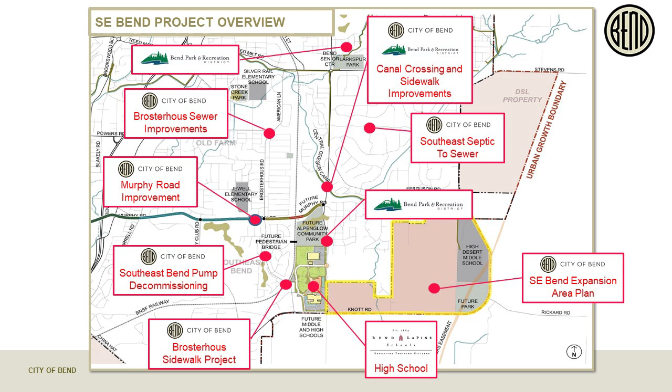So first of all, this is just an overview map of Southeast Bend, and we have this over by the table here as well. We've been bringing this to all the open houses and public meetings to really show all the investment going on in Southeast Bend currently. It's not just Murphy—this is specifically public spending or public investment, not including the private projects taking place and the public improvements being completed as part of those.

So we've got the Murphy project, as you can see, right there. Just on the east side of it to the south, you have the Alpenglow Park, which is planned to begin in the later part of next year, 2020 or 2021—I think it's still up in the air a bit. We have the school project taking place down by Knott and 15th, and some pump decommissioning, which you might have seen over along Brosterhous and along Murphy Road.

You have septic to sewer, which Lindsay's here to talk about next, and that's going to be beginning in the early part of 2020. The canal crossing is another park, City of Bend partnership—we've been working with them on the crossing at Chloe Lane and the sidewalk extension on 15th Street. So that's just a quick overview.

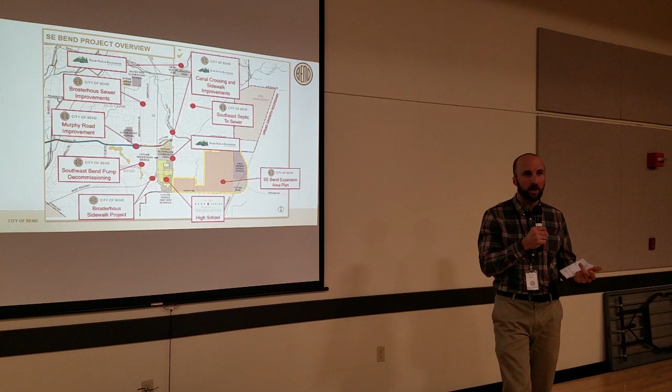We can talk more about that and the timing of it. These are projects that are funded or anticipated to be funded and built in the next year. So that's one of the big things we have to coordinate as Murphy's being implemented—trying to phase these projects to do the best we can to limit our impact and overlapping detours and things like that.

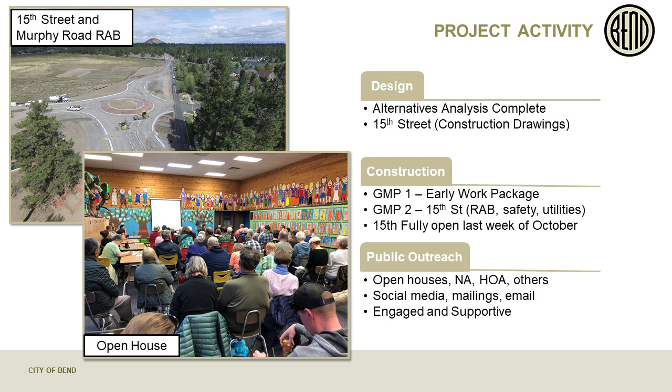We can move on to the next. So to get into where we're at with the Murphy project today and some of the activities—we'll talk more about it in the next slide—we've really been focused on 15th Street. With this project, we're using a design-build delivery method, which basically means we're designing this whole corridor, which has been approved by council, and we're breaking out construction packages over the next 2 years to construct it.

This year we've really been heavily focused on 15th Street, and that's part of coordinating with other projects taking place with the parks, school, and septic to sewer work. We didn't want overlapping traffic control plans, so we wanted to start on this east side to get away from those projects and move west.

Some of the construction we've done to date: we have the roundabout, the extension up to the north, and our embankment going up to the bridge overpass, which will continue this fall and hopefully be completed this fall.

Lost track. Oh, conceptual design. I'll get into that in these next couple slides.

We've had a real heavy focus on things we've talked about at our previous open houses. The first phase is really figuring out what are the needed improvements along the corridor, what the capacity growth will be over the next 30 years, and what we need for a cross section — two lanes or three lanes.

What are the major intersection improvements needed at 15th, Country Club, Brosterhous, and Parrell Road? Some of these areas are seeing higher volume turning movements and a lot of growth over the next several years.

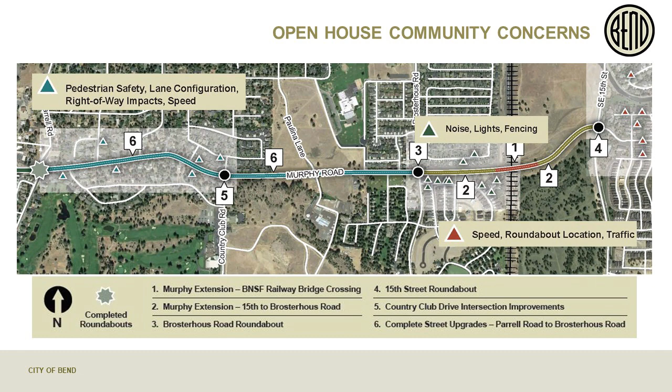To talk a little more about concerns we've heard at these open houses over the last several months, we put together this exhibit which concentrated the concerns into three areas. It's not everything we've heard, but it represents the larger messaging.

With the 15th Street roundabout, there's a lot of concern about speed along 15th Street, about the roundabout's proximity to the Bridges community to the east, and about traffic — are we going to be promoting more traffic into their community?

That's something we coordinated with them. We tried to optimize our design to help with that.

As you continue to the west, there's a great benefit, as a lot of people have said, of having this extension and the bridge overcrossing the rail — improved emergency response time and reduced delay.

There's still some concerns around it. Right now there's not a road there. There are ways people use that area that they won't be able to use the same way after the construction improvements are in place, and we'll be introducing traffic to it. So there's a built community there.

There's going to be headlights, there's going to be noise. This is something we're trying to work with on our design to mitigate as much as we can, recognizing it's still going to be a change from the current situation.

There are more small group meetings with that community to come. There have been some to date.

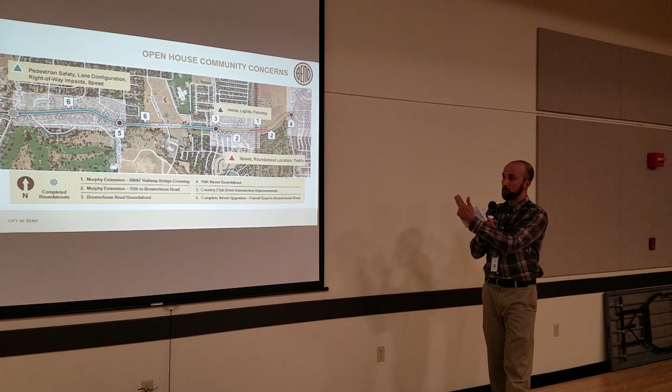As we move to the west, there's really been a large resounding message about pedestrian safety and safety crossing the road. We have a school located over there with a lot of pedestrian traffic, and not a good connected sidewalk currently for them to get to their destination — especially considering we're having a park built here and another school down by Knott Road.

And then right of way — we'll get into the proposed improvements next, but right now it's a 60-foot wide right of way. For this type of roadway, it's typically 80 feet. People just want to be informed.

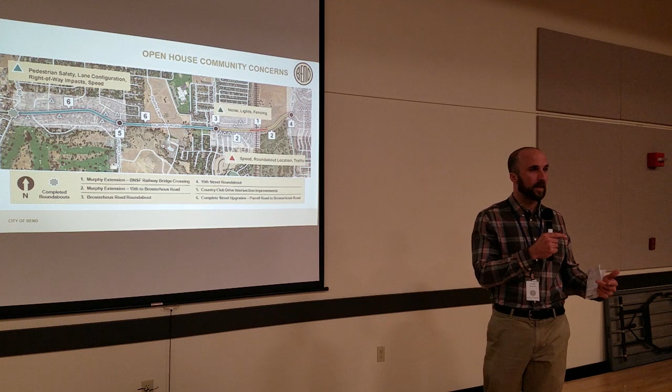They want to understand the schedule, want to understand the process, and that's a big lift we're probably starting here over the next month.

Moving into the next part — this is just a quick snapshot of what the cross sections look like. We ended our conceptual phase of the project, and we're now in design/construction because of our delivery method.

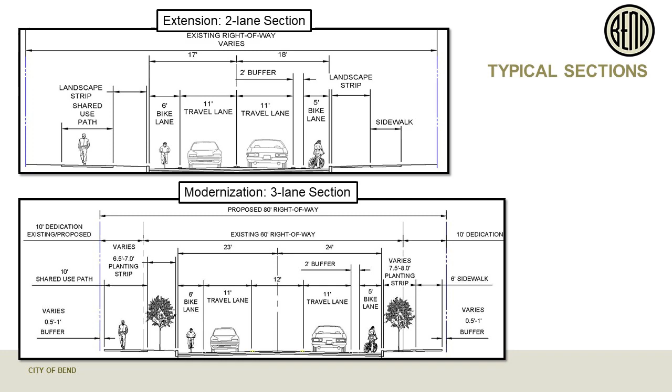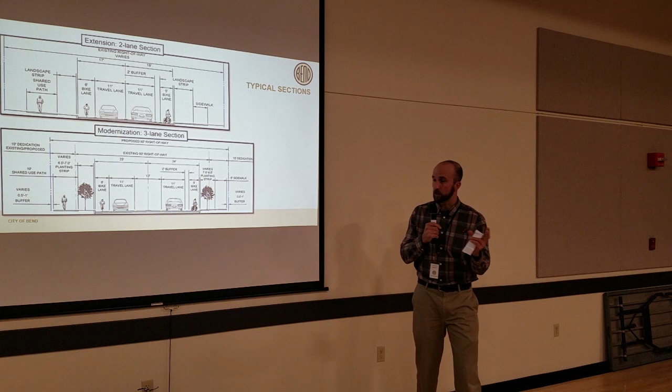The summary is that the modernization segment, Parrell over to Brosterhous, is primarily a three-lane section with roundabout treatments at the intersections of Country Club and Brosterhous, and then a two-lane section going east from Brosterhous over to 15th Street, once again over the BNSF Railway.

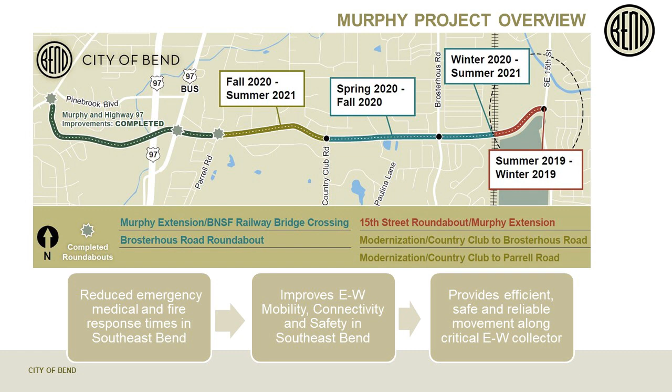And up in the upper map here, what we're trying to show is that now that we're out of the design phase and starting to incrementally move to the west, we're solidifying our construction schedule a bit more. So these dates aren't firm, but they're very close to what we're anticipating.

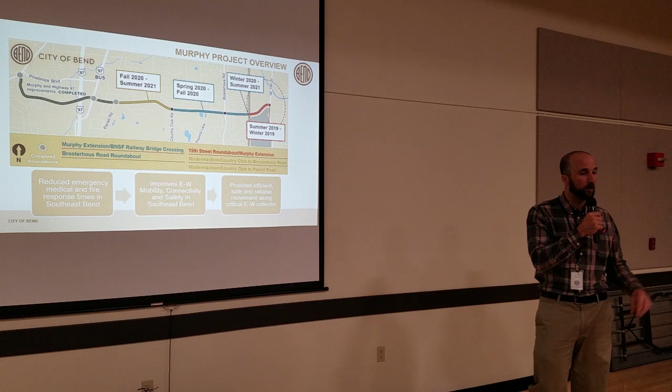This winter, we're looking at finishing the embankment area on the east side of the railway. In the spring of next year, we want to start a continuation to the west. Our first spot will be starting at the Brosterhous intersection, February or March depending on weather, then continuing west toward Brosterhous, then continuing west over toward Country Club roundabout, and trying to finalize all the improvements by early 2021 or summer of 2021.

And this is just a rendering that we put together for the bridge, and a lot of the questions we've been getting from the Hidden Hills community and Larkspur community. We've been meeting with individuals or doing emails, and we're planning on doing some more small group meetings and open houses to share this a bit more so people can start getting a visual of what this new extension and overpass is going to look like.

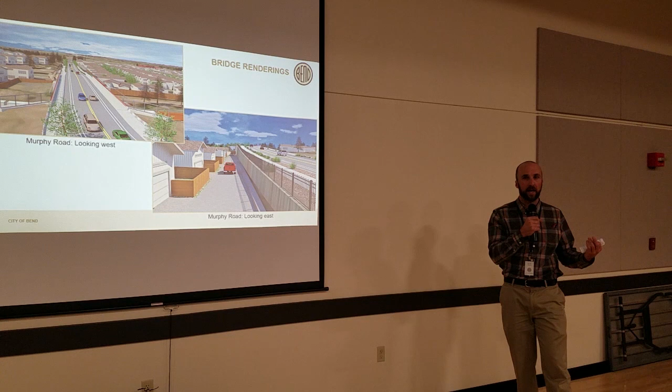One major piece we have here is we have to coordinate with BNSF to get approval for this bridge, and there are a lot of requirements around that. I will say they've been good to work with so far, it's been an efficient process, but it has requirements for their clearance above the rail, and it moves this road up to a higher level than some people might be anticipating. So we want to share this and get that out to the community, get people aware, and see what concerns they have and what things we can work into our design to address those as best we can.

And that's going to quickly continue to the west, for a lot of these right-of-way conversations about parcels that we may need to purchase some right-of-way for these improvements.

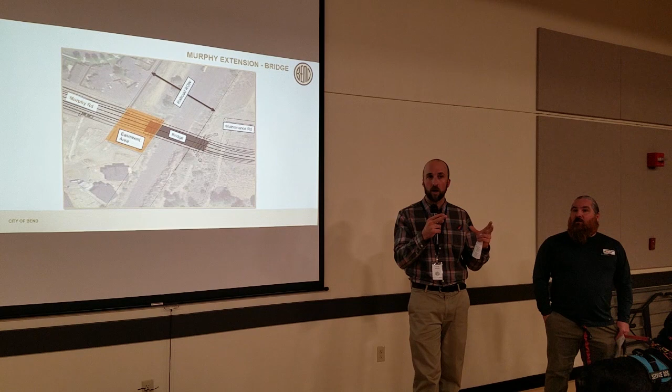Also on the website, you can scroll down to the bottom and sign up for project updates. You'll get weekly project updates during construction, telling you what the detours are, telling you if there are any changes coming, giving you some photos of construction. Additionally, we'll have emails telling you about open houses coming up and other opportunities for us to reach out to the community and get input from the community as well.

And the other piece I was missing is if you are one of the community members directly adjacent to the corridor or one of these areas like the bridge overcrossing, where we're talking about some of the small group meetings, you'll most likely be getting a mailer or something in the mail notifying you that we would like to coordinate a meeting.

Okay, so due to the issues we had with traffic and whatnot, we'll take maybe three questions on this, and then I encourage, because this is an ongoing project that is funded, please get in contact with Garrett so that it can be addressed, and it'll be continually addressed at more and more of these meetings. So Butch, let's start with you.

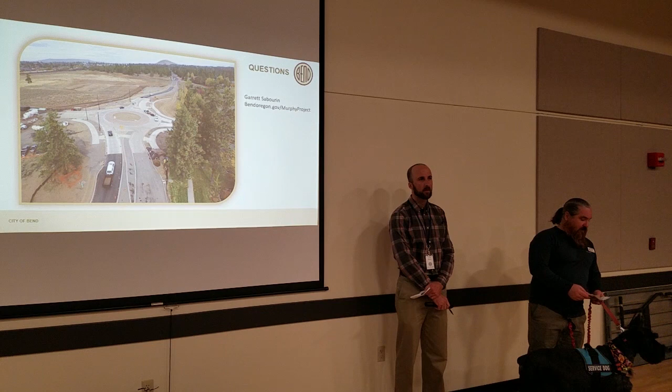Thank you for that information. That's very helpful. We actually have been trying to get a hold of someone in your office for quite some time about a particular safety issue that's developing as part of this construction.

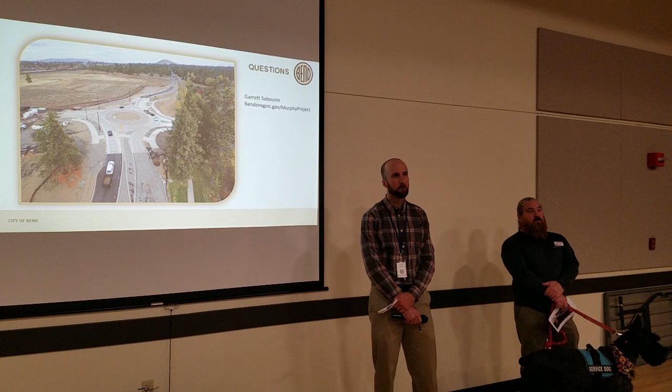We live off of Ferguson, and 15th Street is our primary access in and out of, well, everywhere. Forever, there's been enough space on Ferguson heading west that if a car is trying to make a left-hand turn across two lanes of traffic, another car can turn right. Now there's a curve there, so only one car can go up to that stop sign heading west at a time.

And when we have two schools and a park down at the southern end of 15th, you're going to have school buses and cars lined up trying to make a left-hand turn there across two lanes of traffic, and that's going to take forever. All the cars that have to go right are going to be stuck behind those people, and they're going to cut through Kings Forest. So all those kids trying to walk to the school bus and ride their bike to school are going to be dealing with angry motorists whipping through Kings Forest to get up to Reed Market because they can't get past the buses trying to turn left.

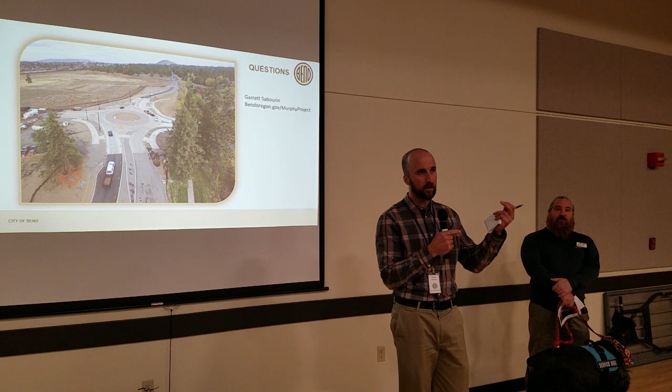So this was a topic that was brought up at City Council as well last night. I think there are several community members whose voices have been heard. We've gotten a few CSRs over it. I've gotten some emails specifically to the Murphy Project email address.

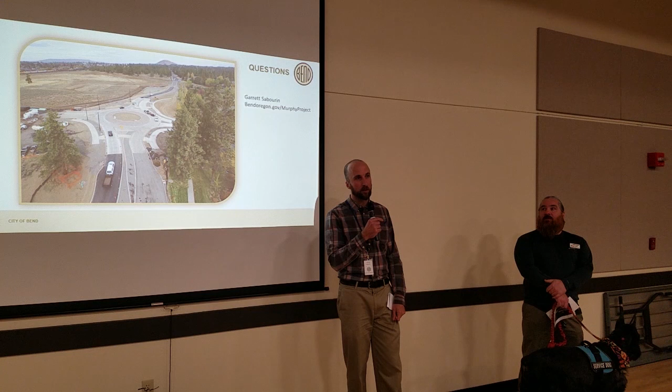I think it's something I want to continue to talk about with some of the community members. I want to understand a little bit more, and I also want to go out and validate some of these concerns that have arisen since we've made the improvements — concerns specifically around the queuing and whether or not this is an increased safety issue, and whether or not this does actually create some cut-through traffic.

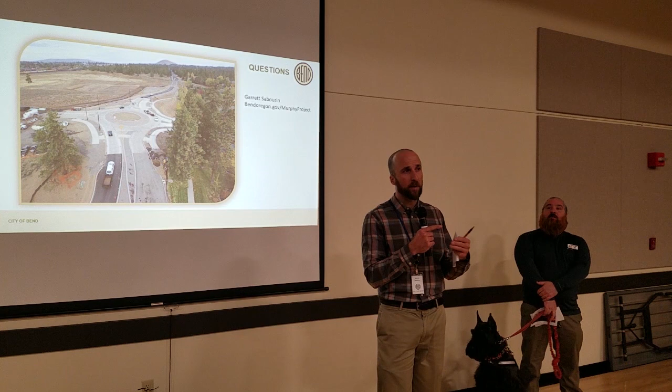Those are things that, as soon as we do open up 15th again to southbound traffic, I'd like to make efforts to address. Before going down that path, I'd also like to provide some of the reasoning why this became this kind of interim improvement. I say interim because with the TSP, there's a project proposed for this intersection to address some of the safety and capacity concerns that existed before we made this temporary fix.

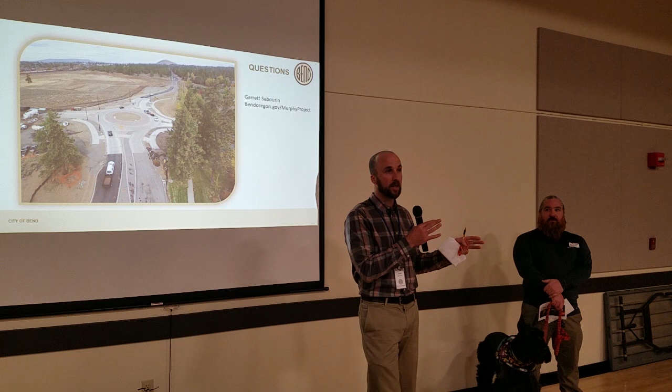Part of the reasoning why we saw that need now is we were getting complaints from the other side, and CSRs from community members about vehicles coming down 15th Street at high speed and cutting the corner into Ferguson. There were some accidents. It wasn't one of our highest intersections as far as number of accidents and severity, but it was something we were hearing a lot about.

Knowing that we were building these sidewalk improvements on the west side of 15th Street, and that there's a park going in south of Murphy and a school south of Murphy, we're expecting to see a lot more pedestrian traffic because we're improving that pedestrian connectivity. So we also needed to figure out a way to address those safety concerns at that intersection in an interim way.

Our traditional intersection wouldn't be skewed like that, and that's part of what's creating that initial safety concern of people coming fast down 15th and cutting the corner onto Ferguson, which I think everybody can admit was a concern, a little bit of an issue. But what we did take away is that opportunity to cut around those vehicles going left.

When we put the curb in, it turns that intersection so that it's perpendicular to 15th. So it's more of a traditional intersection where the driver is facing the road, with a clear sight line to their left to see approaching vehicles and pedestrians crossing. You don't have vehicles going around to the right with that sight line obstructed. That's our engineering reasoning behind it.

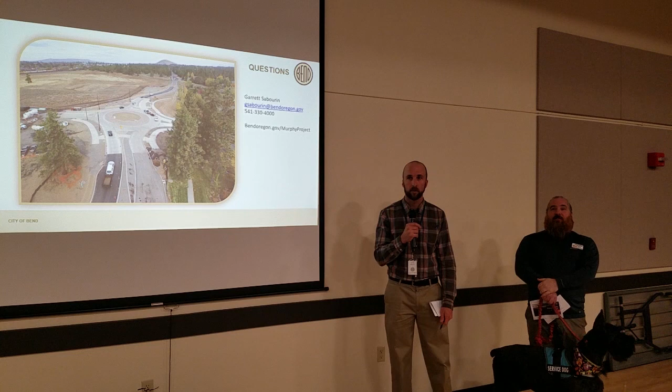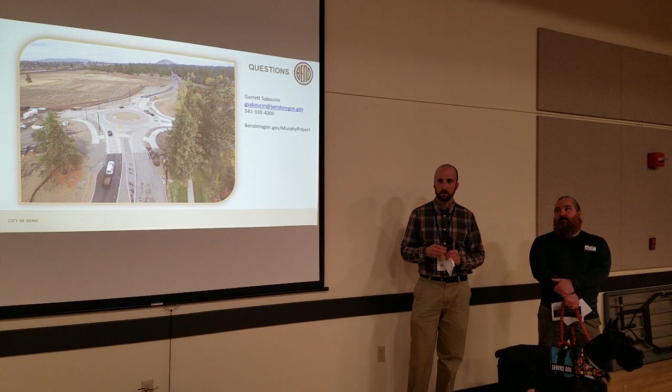My question is, we're putting 2 schools in there, correct? And then how many houses are going to get packed into that spot? And how long is this going to last with all of that density going in there? That's my question.

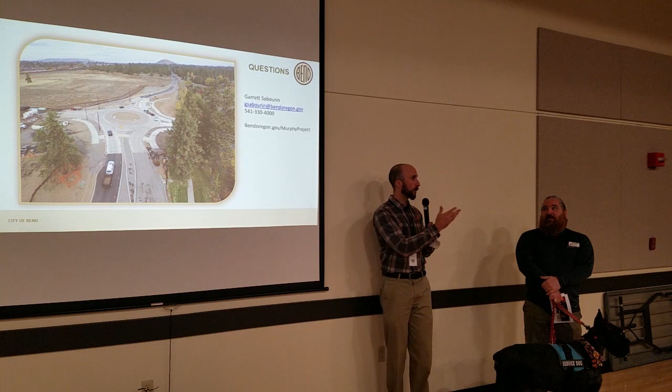I can answer without getting into the specific numbers of houses. But what we do—how many houses are going in there, and what type of housing, is it high density—we would have to talk offline. That's a whole opportunity area along 15th Street. There's specific zoning, and there's work going on in Southeast Bend in the expansion area, which isn't currently zoned. That's an area they're working on.

What we do is a large regional modeling effort when we do these transportation corridors. We look at the zoning, we look at what trips are generated for those areas, and we plan our infrastructure out for a 30-year model. On 15th Street, we're looking at much larger growth than what we typically see on transportation projects. Usually it's a 1 to 2% growth rate, but on 15th Street it's almost 6%. So it is significant, we recognize there's a lot of growth there.

I don't know the specifics of housing numbers, I'd have to talk to planners and private development, and that's information we can get for you. You can send that to that email address, and I can get you more info on that part.

There's also an active citizen committee working with the city—the Southeast Area Plan, CPAC is the acronym. Once again, those people aren't even inside city limits yet, but they're inside the urban growth boundary. So I know a lot of these questions people want answers to, but I don't think they exist yet. I'm not trying to dismiss people's questions, but they are literally trying to figure out how to expand out to the urban growth boundary as we speak.

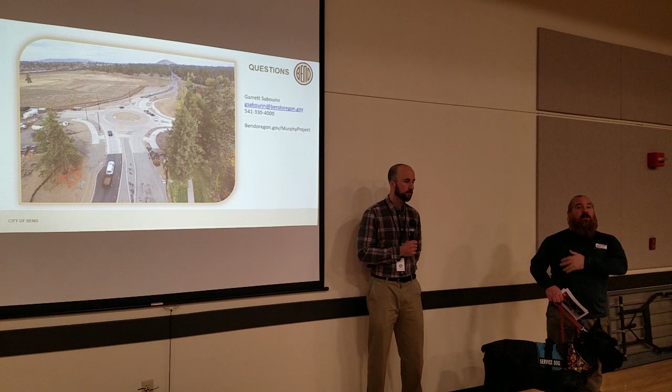So just keep staying focused and keep asking questions. That is the only way the answers will even be resolved, because that area is inside the urban growth boundary but outside the city limits, the area you're referring to. So it is truly unknown at this point. I've heard random numbers, but I wouldn't want to quote something until it's actually inside city limits.

What if some of us don't want that?

You're not gonna like my answer. I understand the issue, but there's a lot of people that want everybody to be the last person that comes to Bend. We wanted to close the doors a long time. I get that, but most people like to think that you can move around the United States freely, so I would hate to... I don't really have a friendly answer for you.

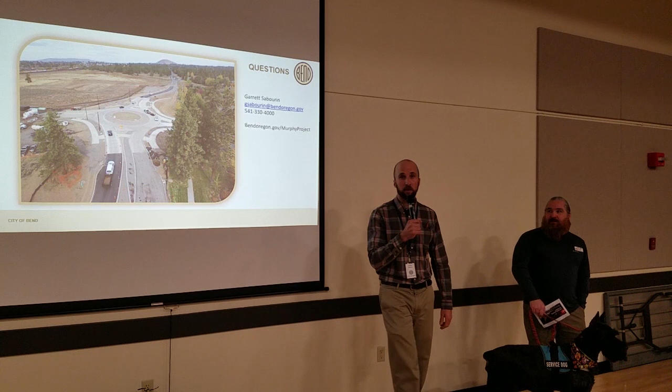Is 15th going to have a center turn lane? Because right now it's horrible, all those new houses are there, and people are trying to turn in and out, and there's no turn lane anywhere on 15th. Are you talking about south of Murphy? I'm talking about the whole 15th. Oh, the whole thing, okay. I've heard some specific comments about south of Murphy. I've lived there since '77, so...

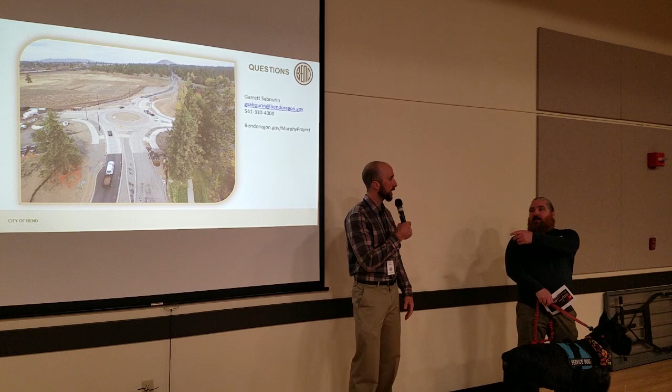This comes back to some of the planning efforts, the TSP, our limited capital budget. What we're budgeted for on this project is to build Murphy. The stuff we've done to the north has been additional funding, specifically from ADA funding in parks, but right now that's our primary focus. There is a project within the TSP that identifies improvements on 15th Street, but I'm not 100% sure of the limits of that, and it's not finalized yet, so I wouldn't want to speak to that. It's in the list for that short term, for that entire segment. There are also several improvements taking place along 15th, but once again, that falls under the TSP, the Transportation System Plan. That's the first time I did an acronym tonight, and last time James gave me such a hard time all night about acronyms.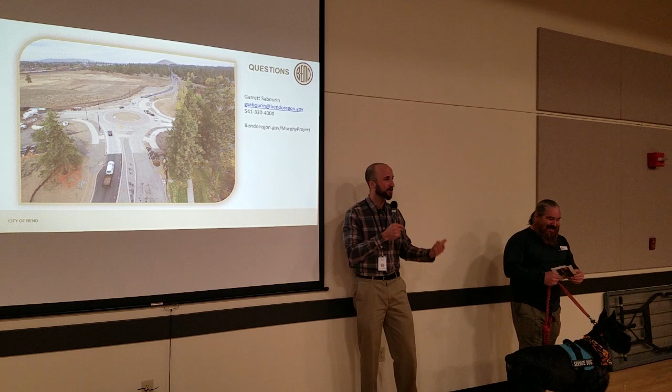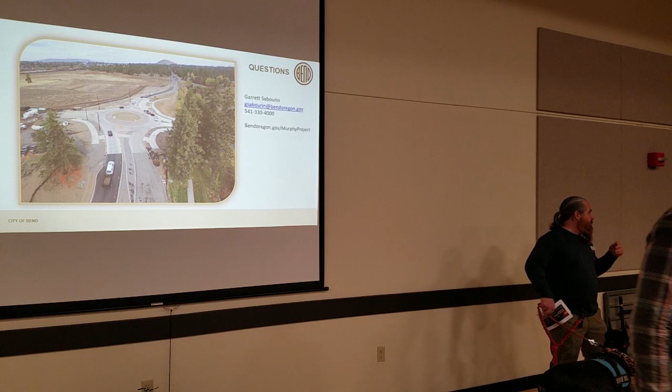Okay, and I promise only one other question, but since you've asked a couple, this will be the last question on this topic. I'm Judy, and I live off of Ferguson, but I use 15th. What's going to happen at the end of 15th, past the high school, when you get to Knott Road? Is that part of yours?

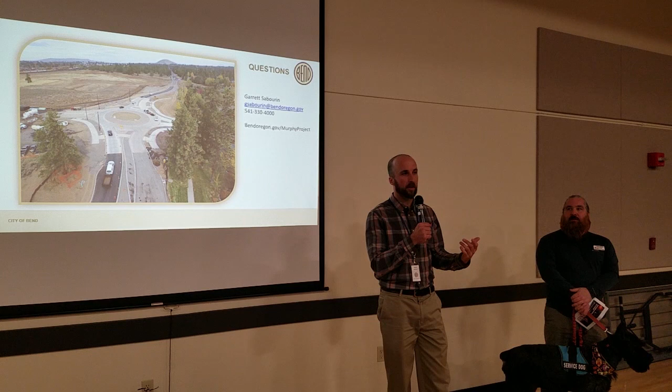Did everyone get that? What's the improvement of 15th and Knott? So right now, the school district is down there building a high school now, a middle school later. With the high school under construction now, part of their public improvements will require the construction of a new collector road that goes through the property, connecting from 15th over to Brosterhous. That's gonna be just north of the high school. In addition, they're gonna be constructing a roundabout at Knott and 15th Street, and I believe that's scheduled to start early next year. They are gonna keep that intersection open while it's under construction, so they'll have a bypass road that goes right around the north of the construction.

Yeah, you're welcome. So, sorry to cut you short tonight.

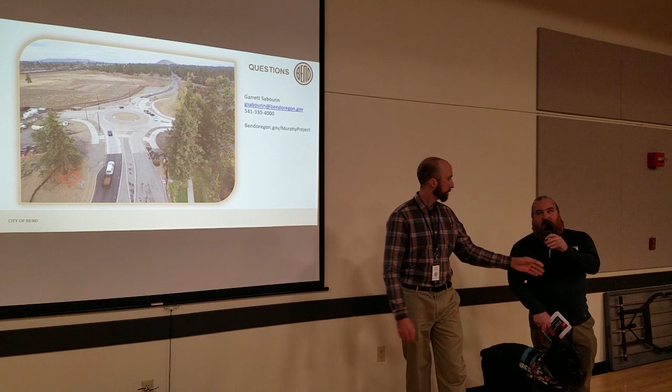So I just got notified that we need to make sure there's a very good understanding of the projects that are funded and not funded, and what's possibly going to be part of this bond in May. So for instance, what Garrett has been discussing for the last 15 minutes, that is all entirely funded. What Eric keeps bringing up, the Transportation System Plan, that is not funded. The city councilors, city staff, and all the lobby groups, whoever you want to call it, are going to be asking the citizens of Bend how to fund this, and there are a couple more funding meetings for the Citywide Transportation Advisory Committee, which has been in function for 2 years. So JD, I think we just need to make it really clear that that first bucket, everything being talked about, those first projects—I'm gonna say the majority of it is not funded. That means it's not happening yet, but it's wanted to happen by the people that have been planning it and thinking about it.